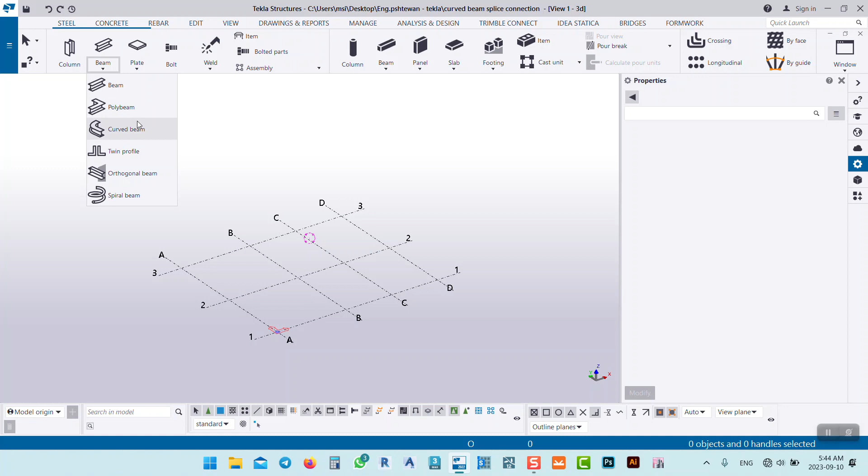In today's lesson I'd like to show you how we can make a curved beam splice connection. As you know, in Tekla Structures we have straight beam, we have poly beam, and the rest of the beams as you see here, and for this I will use curved beam.

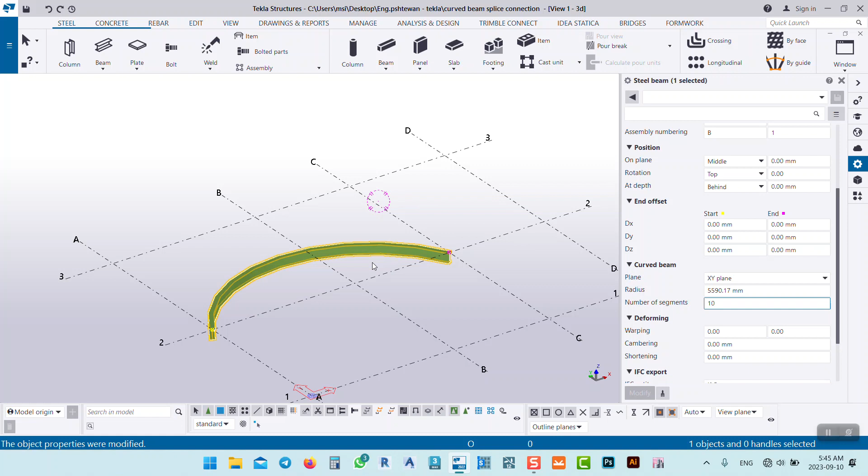So I will click here, maybe click here, after that click here, just like this. As you see, the radius is 5590.17. We can change this, and by default the number of segments is 10. If it looks like this on your computer, just click it and change it to 32, and it will show as a curved beam.

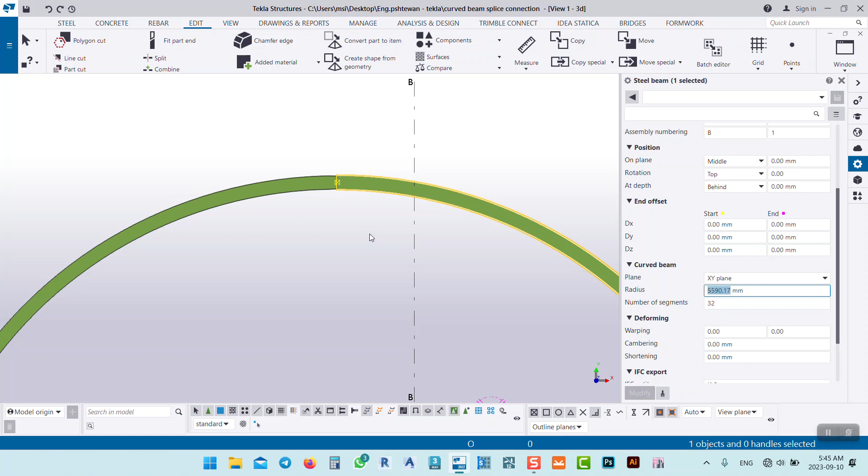Anyhow, after that what I'm going to do is select the beam and go to edit, go to split, and cut the beam into two pieces. As you see here now, we can make it before, or we can change this radius. Remember this radius because we will use this one. We need it.

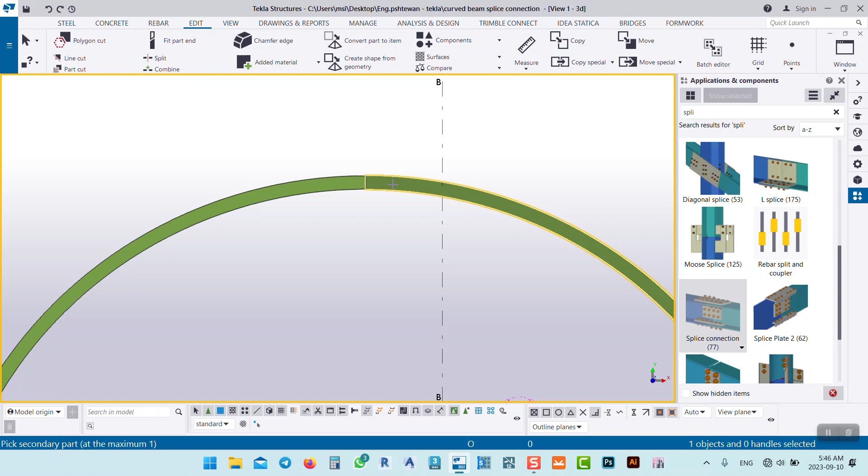After that, what I'm going to do is splice. There are some kinds of splice beams, we can use this one, we can use this one. Just click here, and after that the second beam, if we use 77...

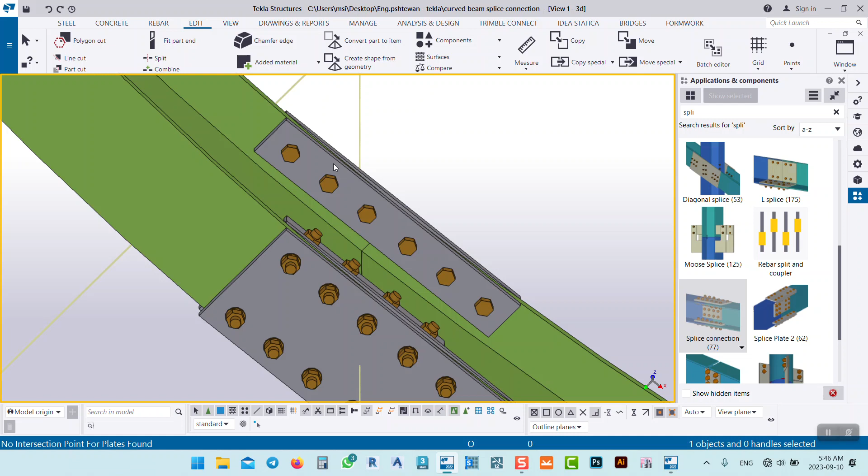When we zoom in, you see there is no... this is a flat plate. If we want to make it curved, how can we do it? We can do it very easily, but we need to change the number of the bolts.

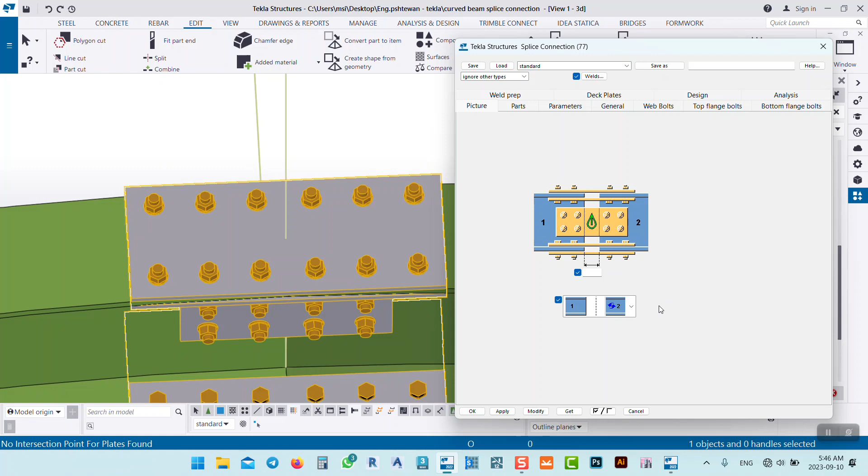We have, as you see here in the picture, the parts: top external let's say 20, bottom exterior let's say 20, and we see here now we have this one. If we don't need inner, we can change it to 0, just like this.

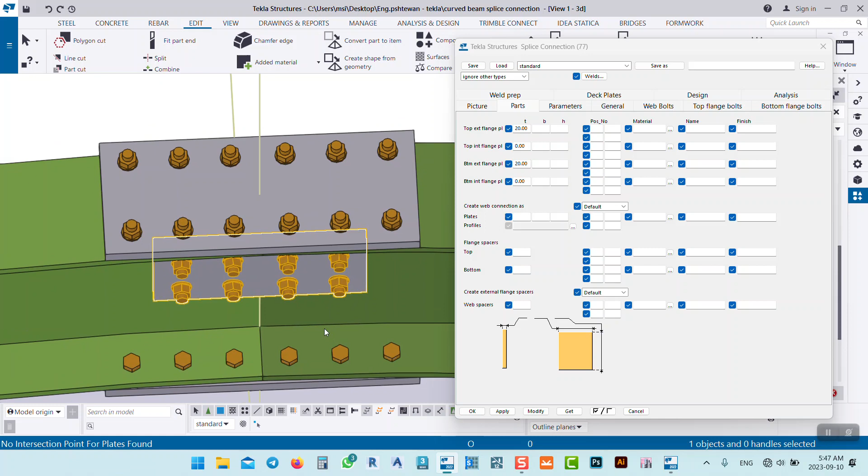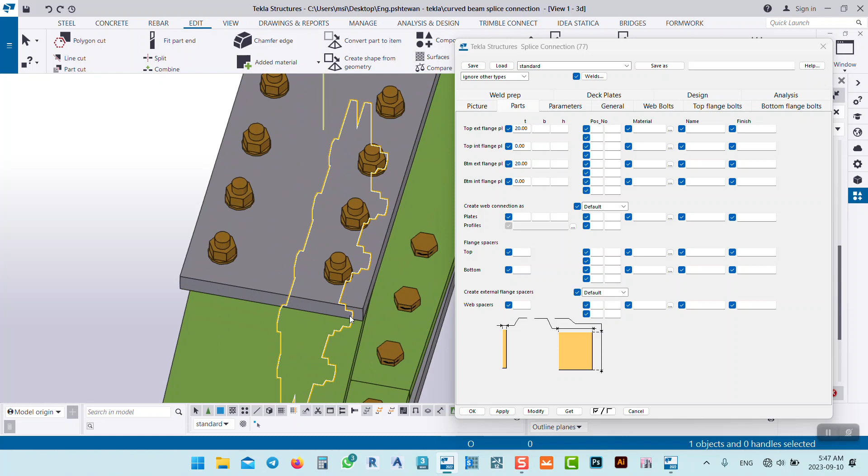You see here, because it's flat and it's curved, we see this one, and on the other side we should see the beam just like the width of the beam, but because the plate is larger than the beam, we cannot see this one. But we can detect this by the distance - here you see this distance is more than in the middle. Anyhow, we will solve this problem, no problem.

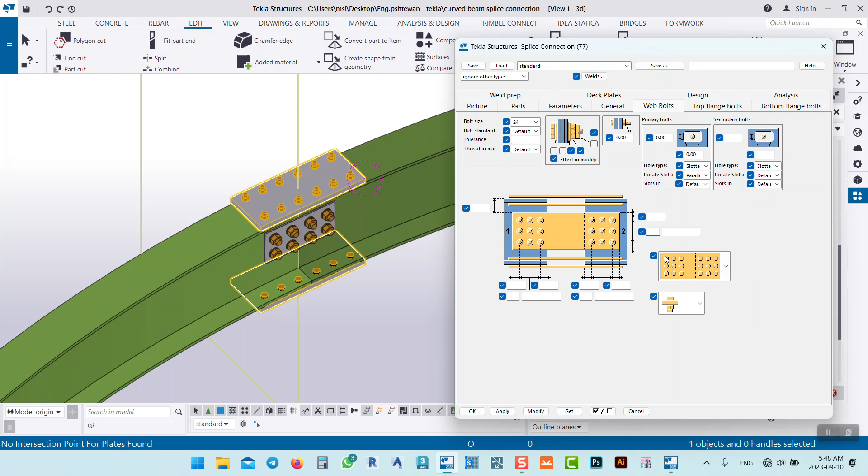And for the parameters, whatever we want to change, we can change it without any problem. For example, we make it 124. Maybe we make it 2 at 100, maybe 100, yes, and just modify it.

You see, now as here, this is the web. For the distance, let's say we have 3 at 80 and 3 at 80, as you see, just like this.

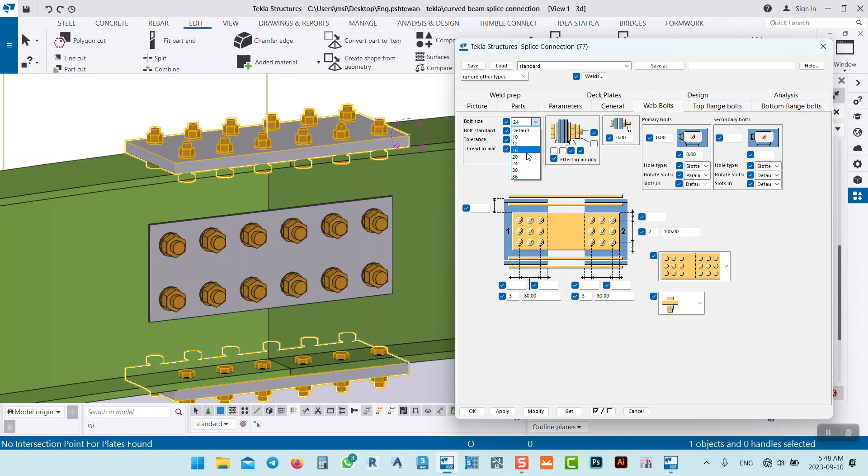And for the top flange, again we have 24. Maybe this 24 is a lot, so we will change it to something like 20 for this one, and for the top flange we have 20, and let's say we have 4 at 80 and 4 at 80, just like this.

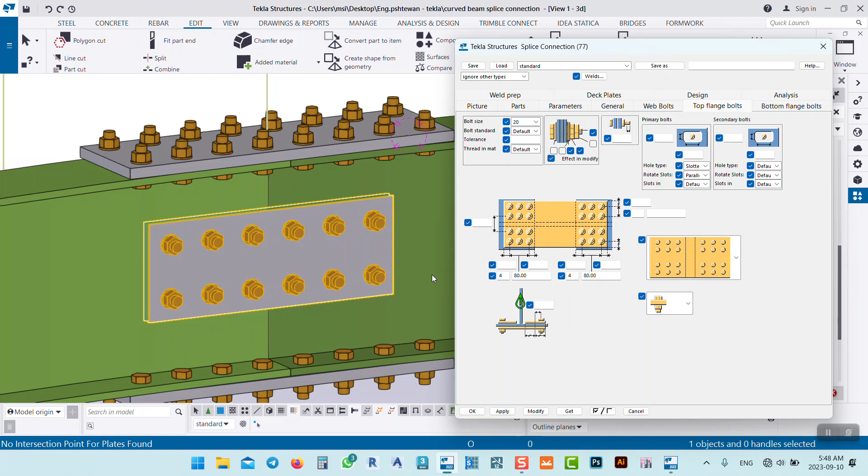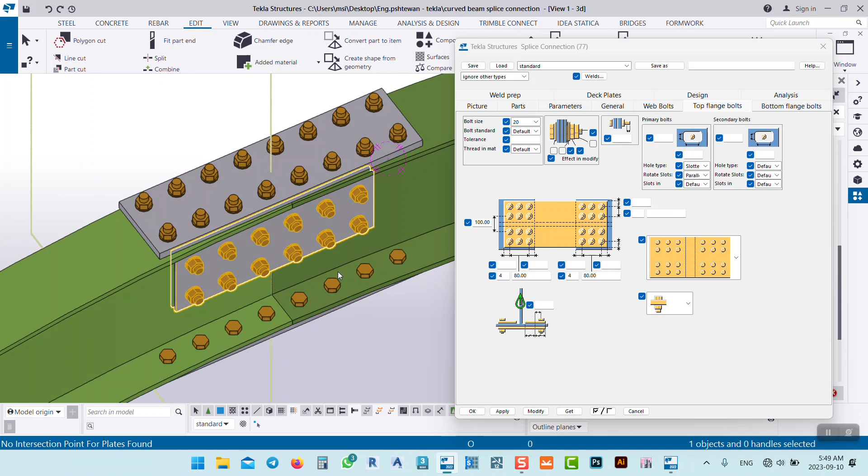And the distance between them, let's say 100. Now it's very good, that's very good here, and we can change whatever we want later. We can change the bottom one, and by default the bottom one will change with the top one if we don't make it.

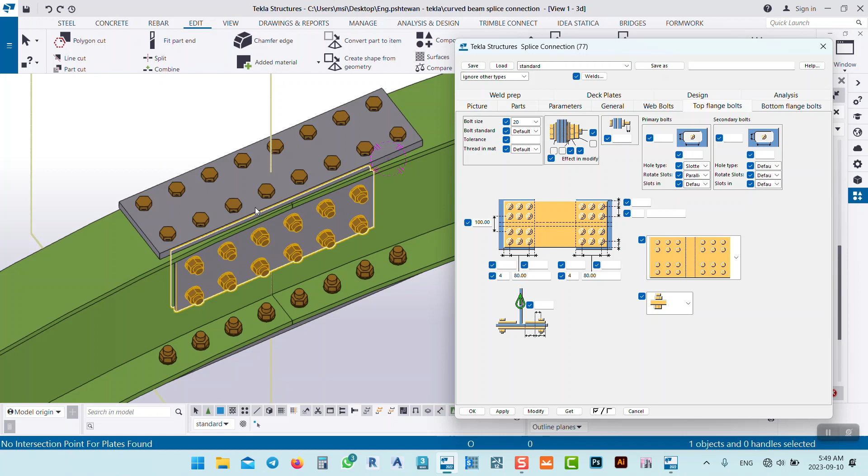Anyhow, for the top flange here, we set it like this and maybe like this, just modify it to be upside down, just like this. Anyhow, after that I'll close this one.

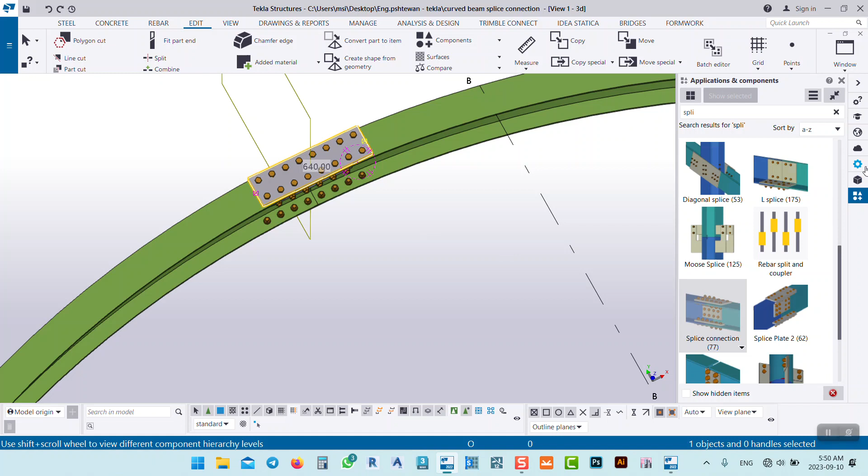As here, this is the curved one and this is the flat, so I want both of them to be curved. How can I do it? I will just go to select object in component and select this one, and I will go to the properties. The radius is here, as I told you before - just remember this radius, so I will select this one, copy it, and paste it here.

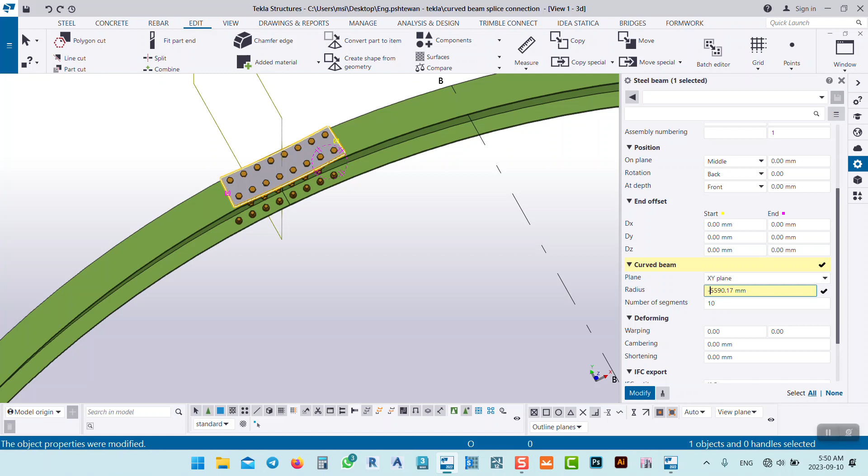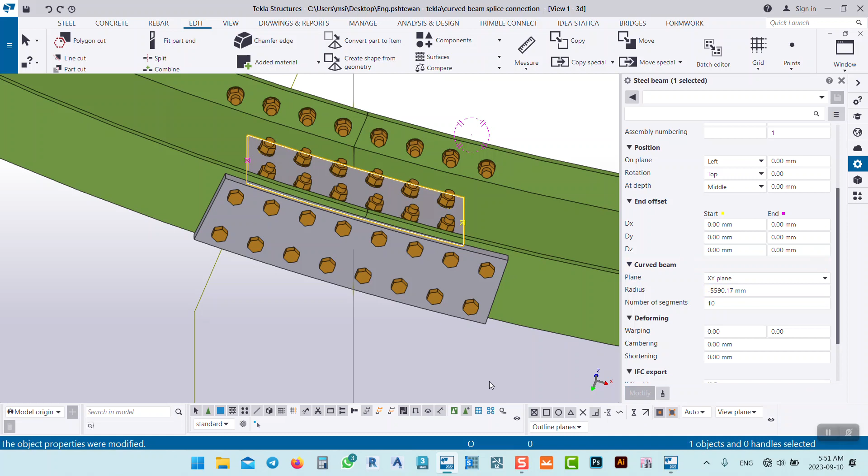Just modify it, and because it's like this, I have to make it with minus, so it gives me the exact radius. And for the bottom one as well, the same value - again it should be with minus, modify, and with this one as well with minus, modify. And now you see it's a curved one, and of course we can move it.

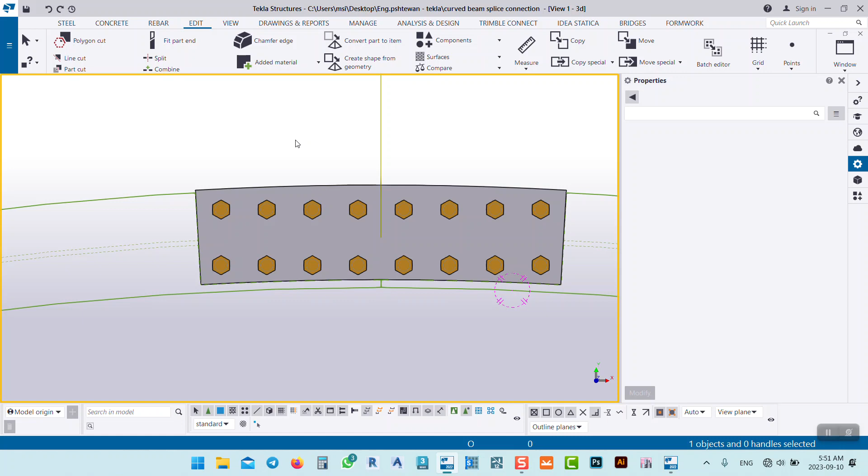We can just go to Control P, so it gives us the top view of it, and we can use Control 1 or Control 2 to see this one, and we can go to right click properties, from the display the rendered here is component rendered, so we will change to wireframe, modify, OK, and we can see the plates here.

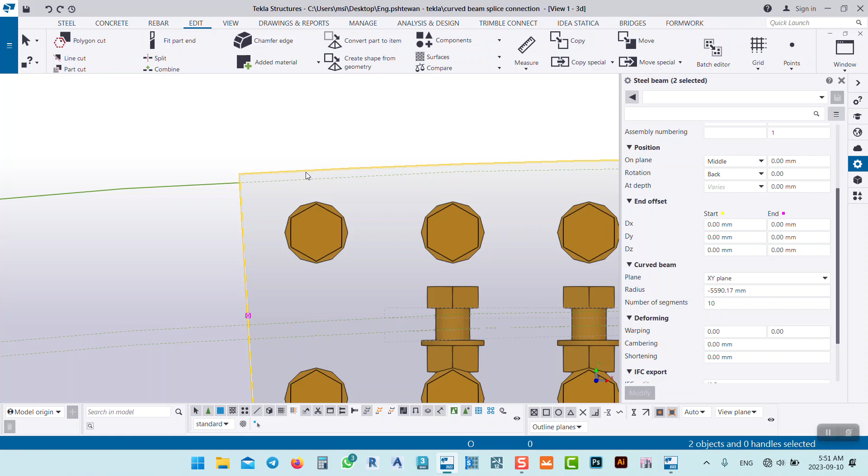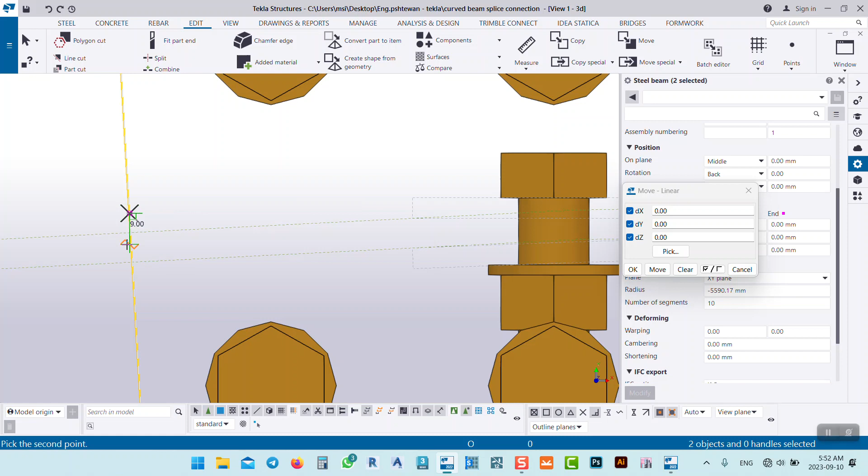After that, what we can do is right click, move, special linear. We can move it from this point up to something, up to the middle maybe. I want to move it just in the Y direction. Yeah, I think it needs more, so pick again.

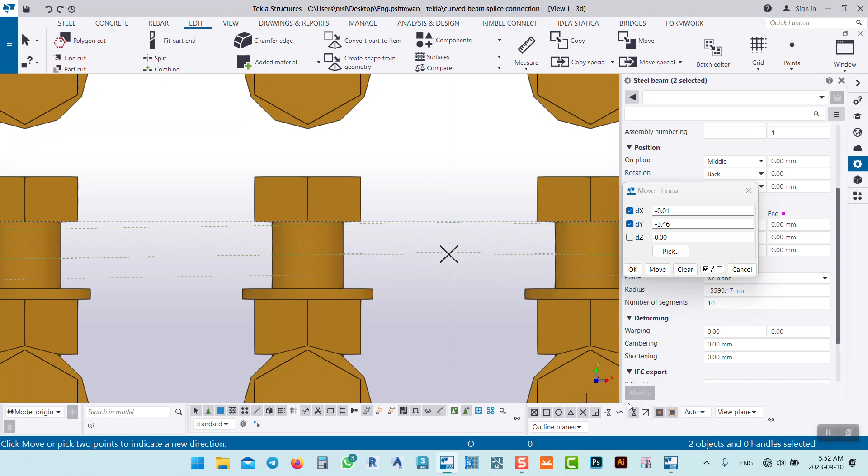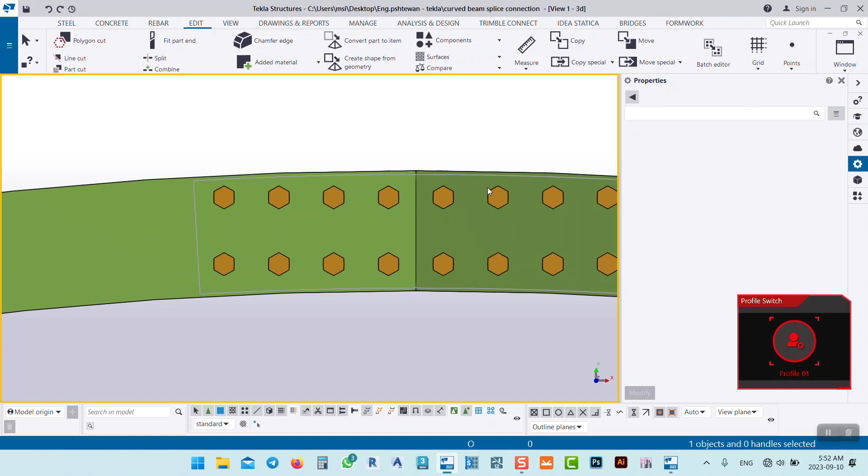Okay, so pick this point. Yeah, now it's exactly, I think, in the middle. And you see now if we go back to Control 4, we see this is the plate, and this is the plate inside the curve. Okay, so by this we could solve this problem.

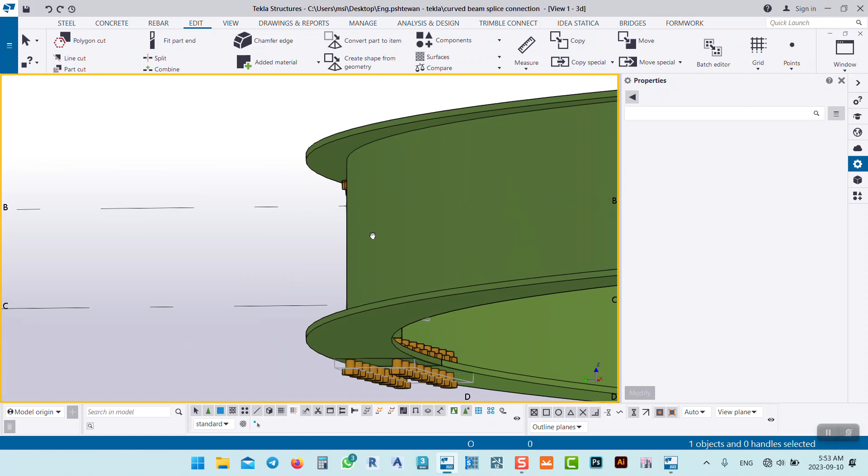And of course this is one way, and there are other ways to do it. As you know, here this one as well - I'll just click and move, properties, and go back to change this one to rendered, and we'll see together. Modify, OK.

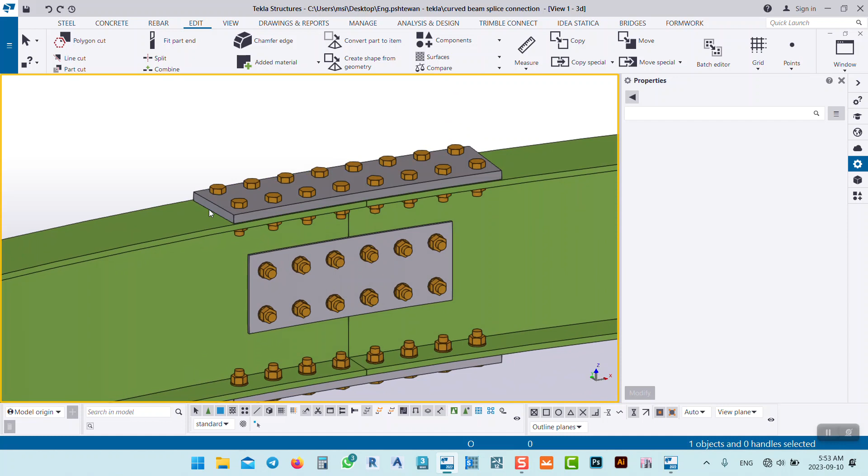I will make this one, and right click, create fabrication drawing, perform numbering, and I'll say yes, create, and we see, and go to the drawing, and we see this plate.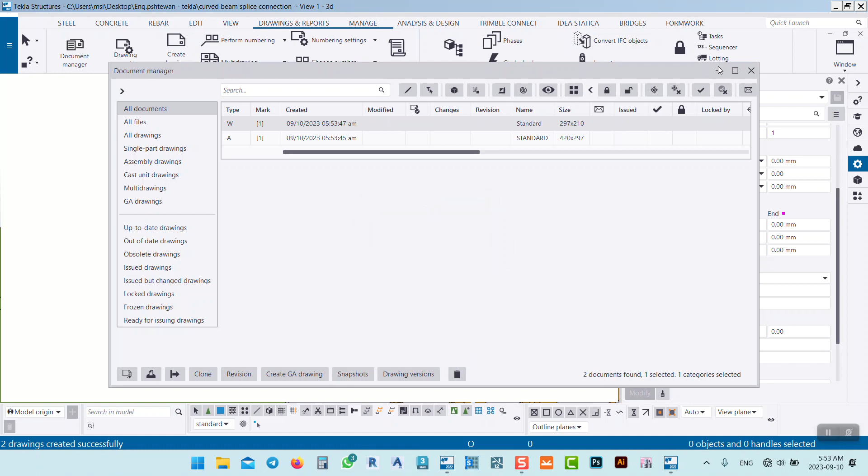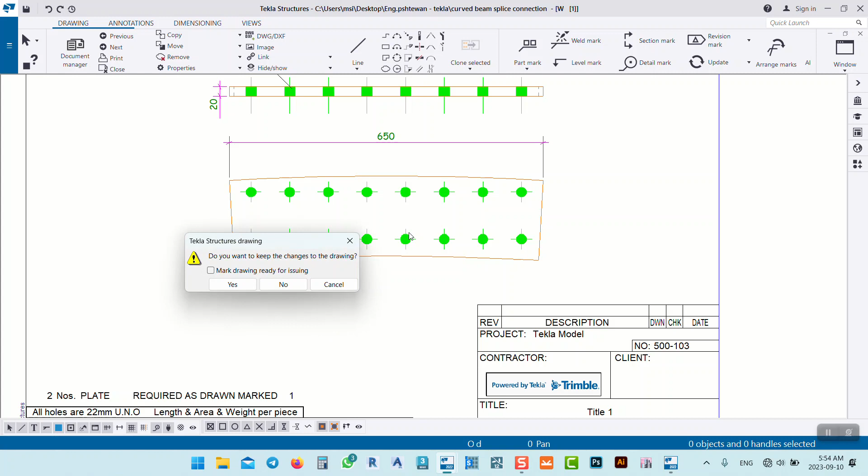As you see, if we delete the dimensions, you see this curved beam - this is a curved beam, sorry, a curved plate, and this is the required thing. Of course this one as well is curved, so we can do a curved splice for a curved beam very easily.